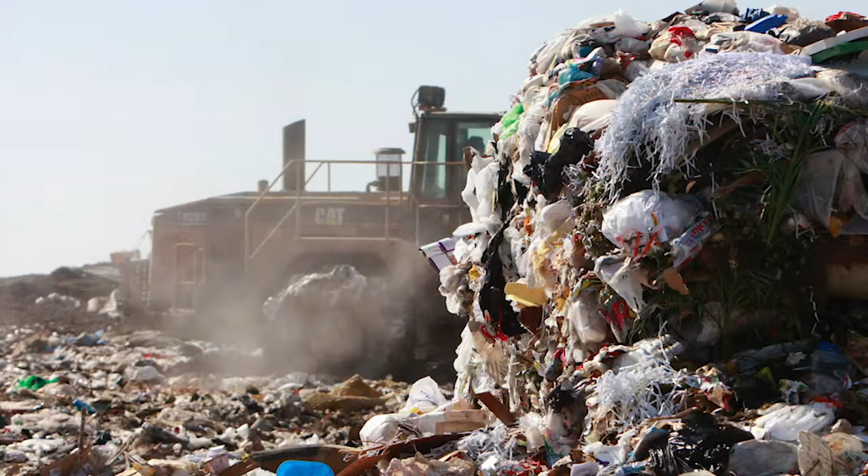Every year, approximately 2 billion metric tons of solid municipal waste are produced worldwide. The World Bank projects that by the year 2050, this figure will have increased by 70%. Finding sustainable solutions to society's waste problem is now a high priority in the public conscience.

For the 2020 Solar Decathlon Design Competition, we are excited to work with a client that is setting the gold standard for contemporary waste management in our home state of Virginia. The Prince William County Landfill, officially designated as an exemplary environmental enterprise, is pushing the bounds of recycling technology, landfill gas harvesting, cogeneration, and much more. Now, the county desires a new building for their administrative staff that doubles as a nexus for STEM education and community engagement. This is where we, Team Compositive, propose the Eco Park Learning Center.

But first, a bit about us. Our team name Compositive is a composite of words sharing the same prefix, such as comfort, community, and complexity. The prefix com means together, and the word positive expresses our optimistic attitude that we bring to the design challenges. Compositive means that we are with positivity.

Our Compositive team is a diverse group of students with majors ranging from architecture and building construction to macromolecular science and civil engineering. We have 7 graduate students and 21 undergraduate students working in collaboration to enrich the knowledge of every member on the team. We divided our team into 5 sub-teams, focusing on the topics of architecture, landscape architecture, marketing, engineering, and real estate, where sub-team leaders coordinated the work efforts conducted by each individual sub-team leader.

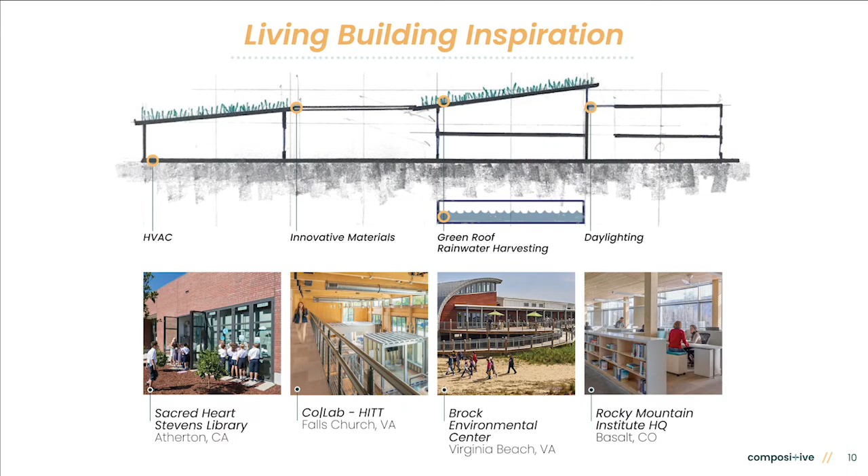We employed a cyclical design process for developing this project. Each new design proposal was informed by engineering analyses and budgeting breakdowns. Iterating through this cycle allowed us to produce effective innovations, pushing the envelope of construction practice while ensuring financial feasibility.

Our design for the Eco Park Learning Center was guided by 4 overarching design goals. First, an emphasis on conservation by activating existing ecology using reclaimed materials and utilizing iTree tools to identify the best trees to preserve. Second, a focus on community engagement by accommodating local school groups and universities, hosting community events, and providing park-like amenities.

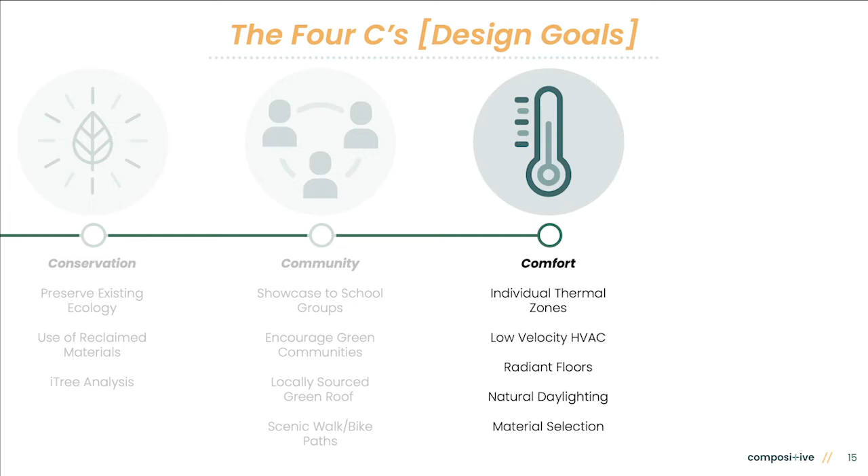Third, a commitment to occupant comfort by planning for individual thermal zones, low-velocity HVAC systems, and biophilic lighting and material selection. And finally, the integration of cost awareness by including concepts of intelligent constructability, finding financially attainable solutions, and maintaining low operational costs.

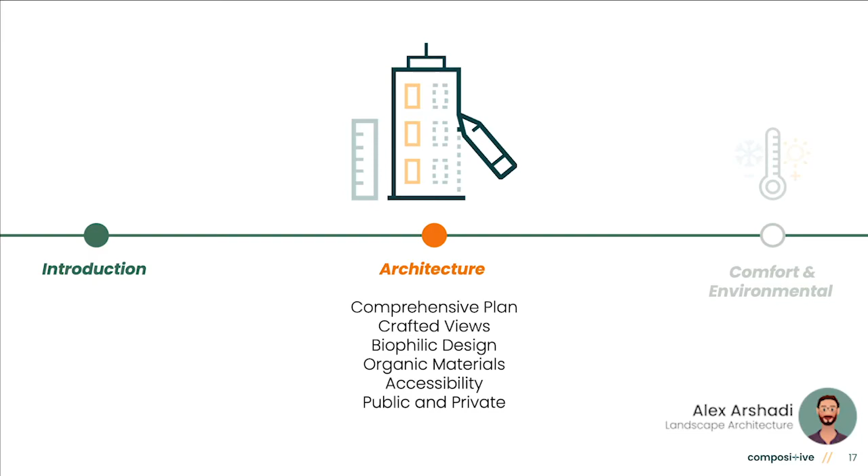Architectural design is where the play of form and function come together. We strove to build the narrative of EcoPark into every piece of the composition. To begin, the boundaries of our building lot do not mark the physical extent of our design vision. We believe in fitting architecture to place.

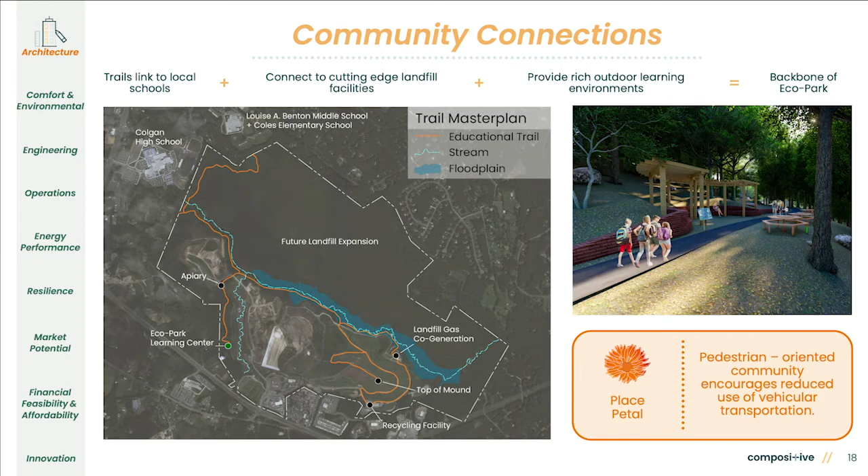To this end, we have provided our client with a vision that links the Learning Center to 3 public schools through educational trails. These features fold into the place petal of the Living Building Challenge by contributing to a more pedestrian-oriented community.

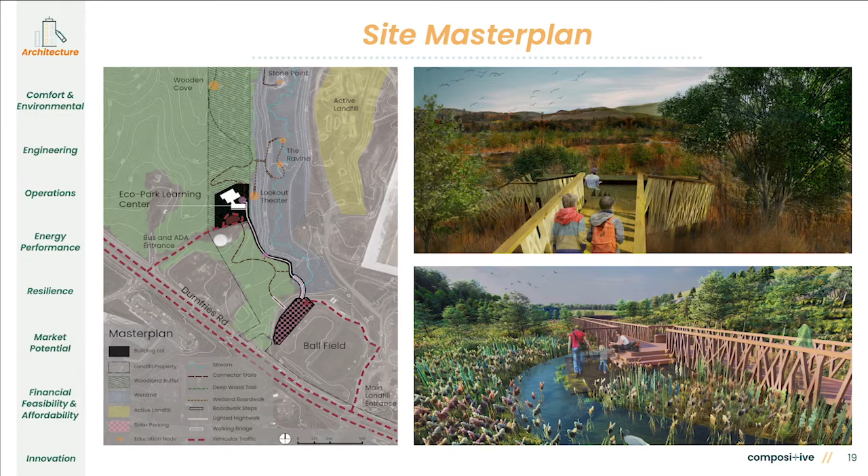A constructed wetland borders our building to the east, which is explored with a boardwalk and educational engagement stations. More trails link to innovative landfill facilities and native woodlands. The EcoPark Learning Center is nestled into a forested area, perched on a hill on the western edge of the landfill property. The building form is conceived to merge the architecture with the landscape and create a strong visual relationship with the landfill.

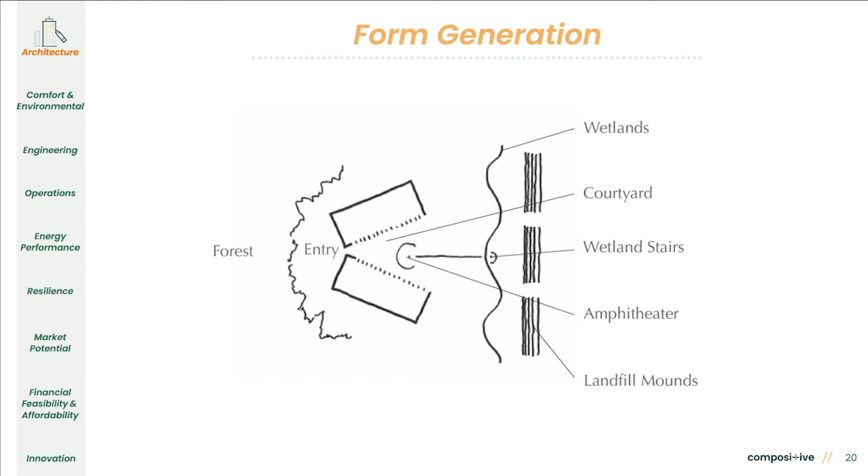The view of the landfill will change as the mound grows over time, offering a strong point of reflection for residents of the building.

Visitors who arrive at the EcoPark Learning Center are initially greeted by a building that isn't there. On approach, a large grassy hill is revealed to be a green roof, and visitors spill into the welcome plaza, where a river of recycled glass leads to the front entrance.

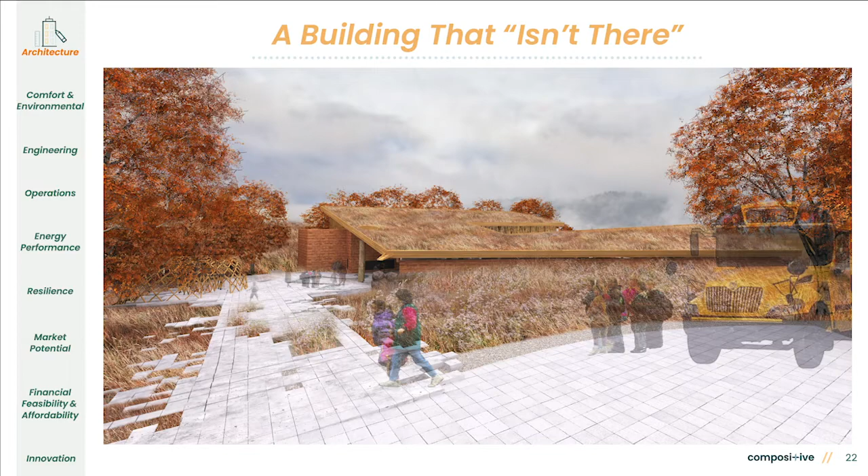Passing through the lobby reveals a central courtyard, framed by the building's wings. The architecture flares open toward the continually morphing view of the landscape, which will change over the next decade from a theatrical industrial landscape to pastoral grassy hills.

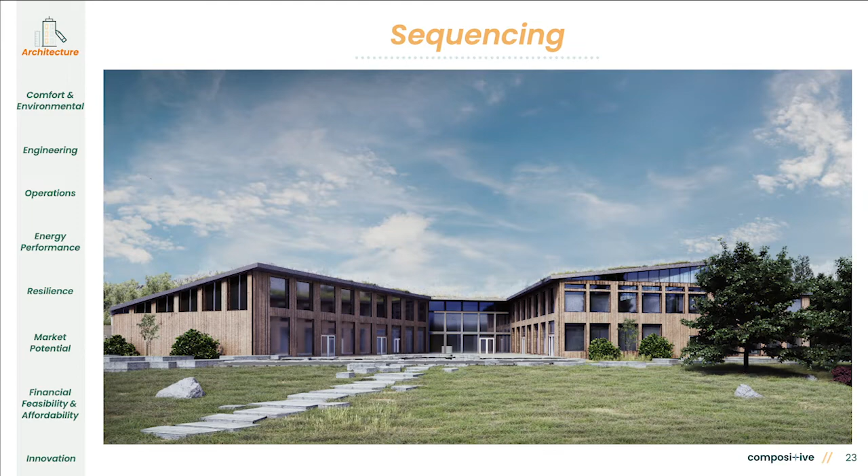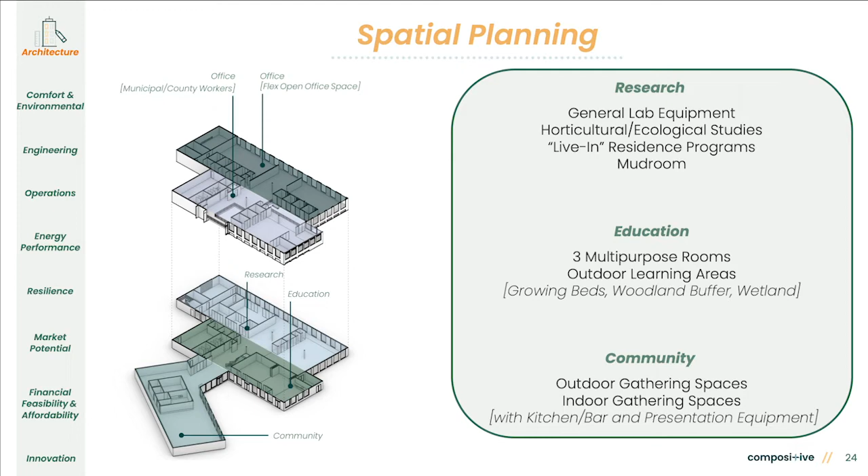Creative space planning allows for community, academic, and office spaces to coexist. Accessible community spaces in the southern wing can accommodate gatherings and conferences. Research lab space on the first floor allows the Learning Center to expand its reach with live-in residence programs with state universities. Educational space takes the form of multi-purpose classrooms on the first floor, tailored to STEM education.

Finally, office space is located partially on the first floor and covers the entire second floor. Separate areas for closed office space are allocated for municipal staff, and rentable open office space is available for tenants. Rentable offices are further divided between the first and second floors to mitigate issues pertaining to noise and privacy. Office amenities include kitchenettes, break areas, conference rooms, breakout rooms, and a lactation room.

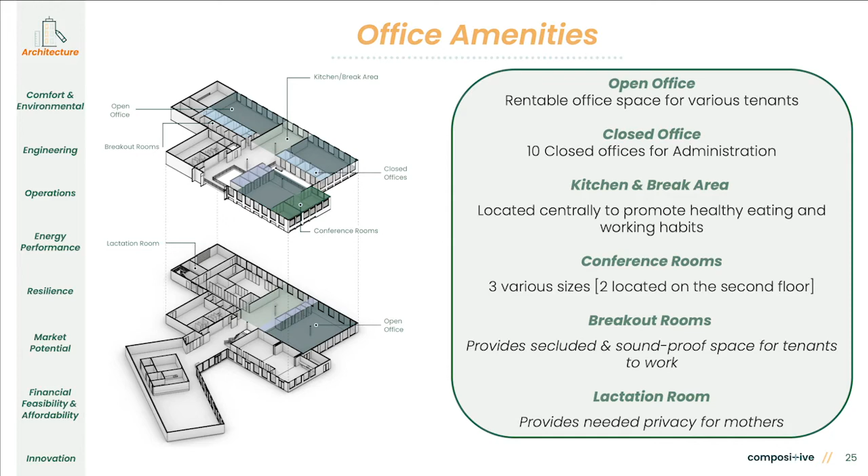Comfort and environmental quality is a priority for the Learning Center's occupants. Inspired by biophilic design principles, we take advantage of natural daylight patterns to provide an optimal interior environment. Daylight factors, including time of day, glare, heat gain, and visibility, were modeled for the design of 2 distinct types of spaces, task-oriented and non-task-oriented.

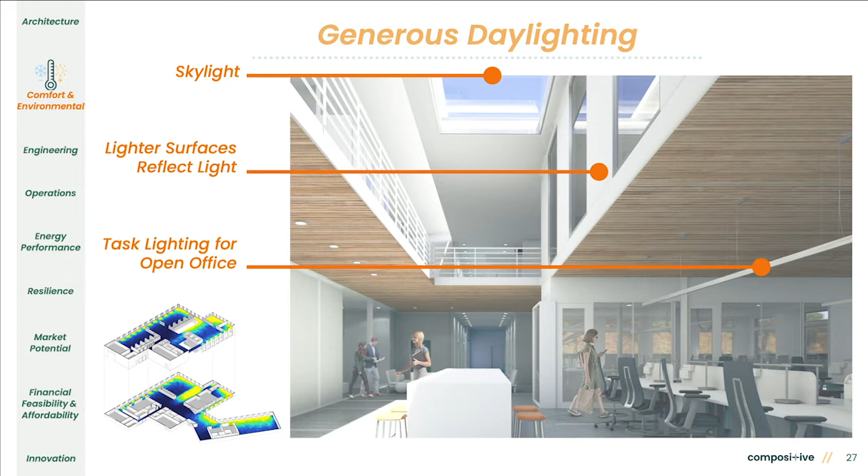Within task-oriented spaces, an open floor plan combined with natural daylight strategies facilitates an improved daylight factor. This increases environmental quality and reduces the need for artificial lighting. Where supplemental lighting fixtures are necessary, efficient LEDs are installed with motion sensor systems to reduce wasted energy.

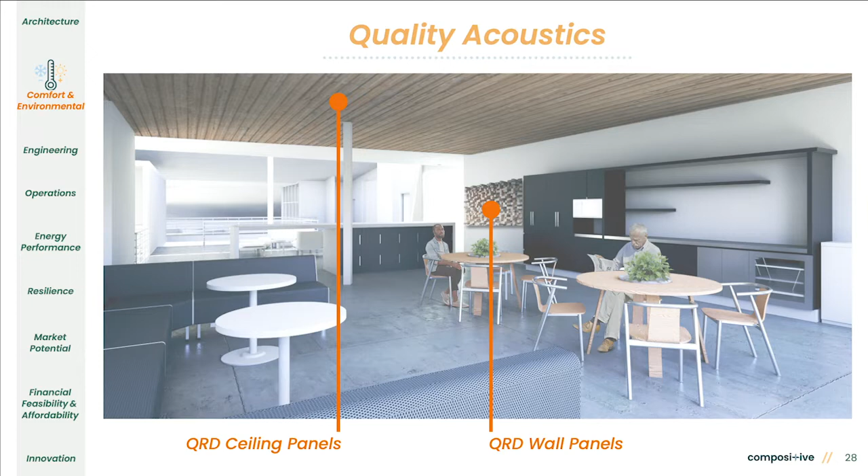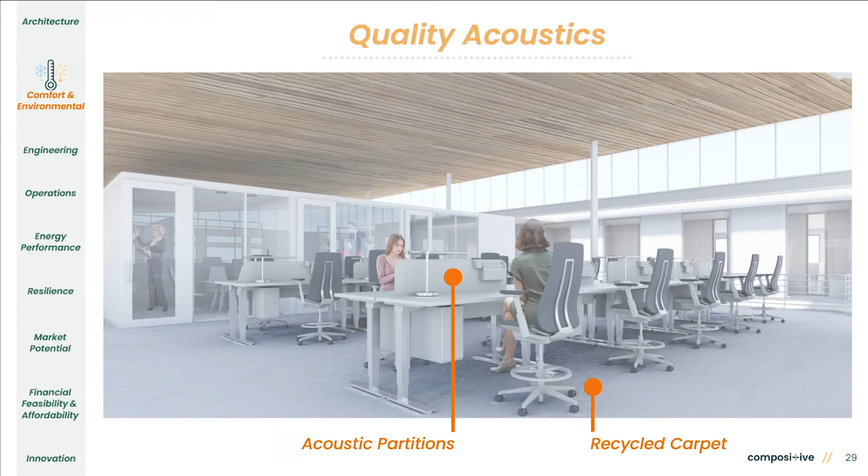Acoustic quality is achieved with 3 design strategies. First, quadratic residue diffusers in the form of ceiling and wall panels diffuse ambient sounds and absorb acoustic reverberations. Second, acoustic partitions between working spaces in the open office will ensure a comfortable environment for phone calls and conversations, while our recycled carpet acts as a natural acoustic absorber to ambient noise.

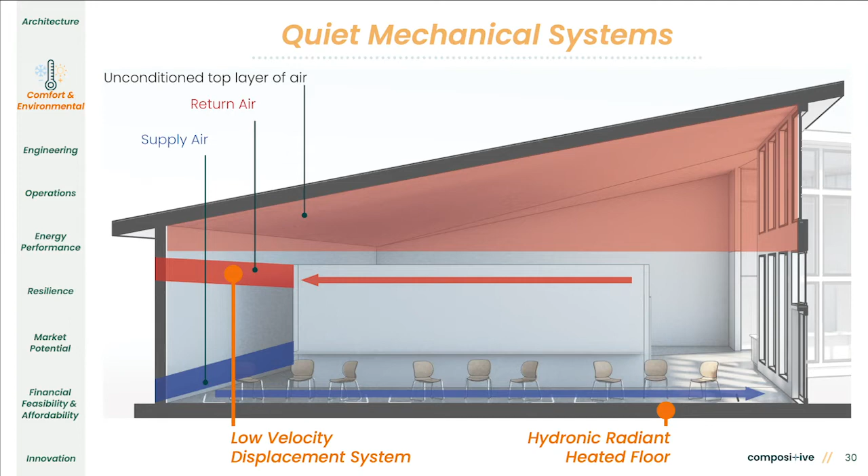And third, the mechanical systems in the south wing operate virtually silent by incorporating a low-velocity displacement ventilation system and a hydronic radiant heated floor.

Our engineering systems are designed to achieve ambitious sustainability goals. The enclosure system of the EcoPark Learning Center includes a green roof, structural CLT, and stabilized earth block veneer.

The first component, the green roof, provides thermal mass that collects heat throughout the day and regulates roof temperature to reduce energy loss. Below the green roof are additional layers, such as an R40 XPS insulation, that reduces heat loss through the roof.

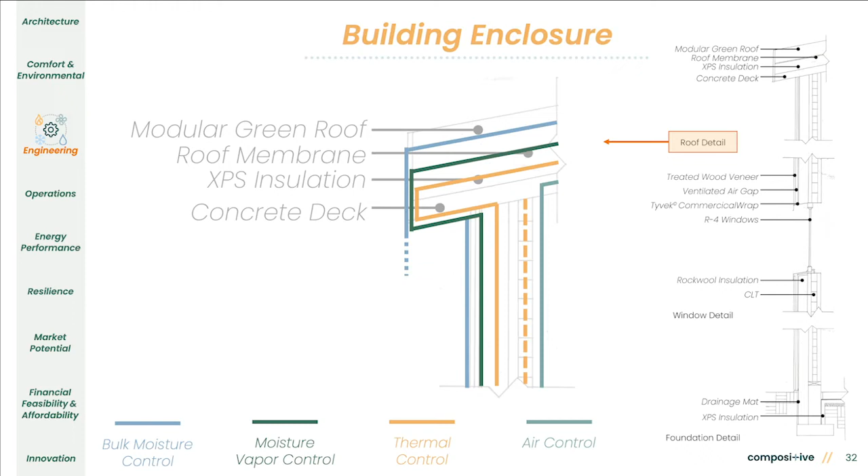The second component, the CLT wall system, adds thermal mass to the vertical enclosure and allows for continuous insulation. Using R33 rock wool in the wall supports our pursuit of a low embodied energy building while maintaining strong thermal insulation. We studied the embodied energy of the enclosure materials and ultimately selected stabilized earth blocks as an architectural veneer because it possesses nearly a third of the embodied energy of standard brick veneer.

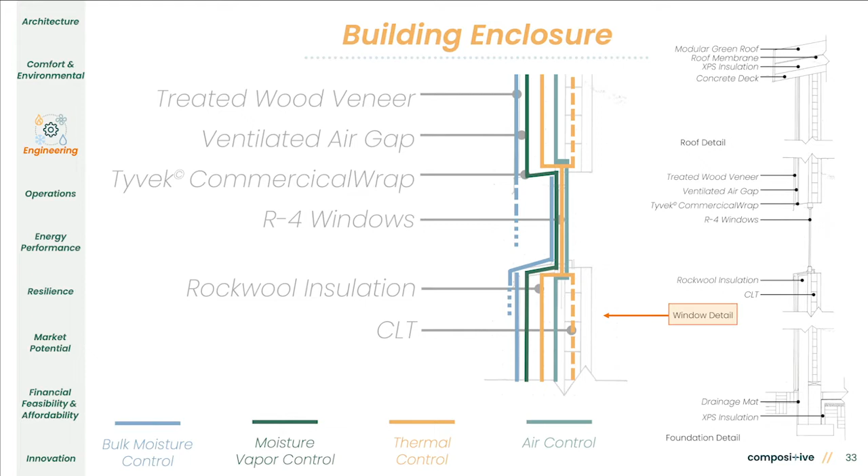Our mechanical systems use 3 major components that provide excellent control of the interior environment. In the south wing's assembly room, a hydronic radiant heating loop warms the space through the floor, reducing acoustic interference during events.

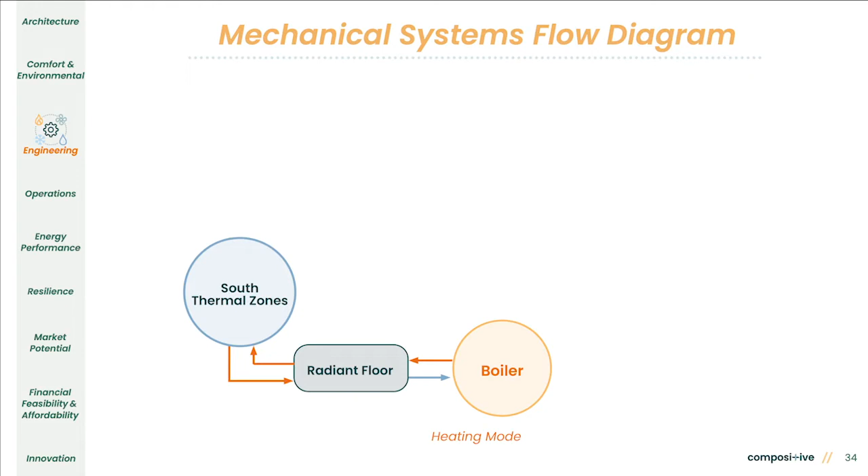For cooling, a displacement ventilation system with an integrated economizer can utilize either outside or return air to condition the space, depending on outdoor conditions. The displacement ventilation air handler also utilizes a heat recovery process between exhaust and fresh air intake ducts, reducing energy demand for ventilation in the south wing.

In the north wing, where offices are located, a 4-pipe hydronic FCU system provides every occupant with flexibility to adjust their local climate. Occupants can modify each of 17 thermal zones designated within the building from their thermostat. Ventilation for these zones is provided through a dedicated outdoor air system with an integrated energy recovery wheel.

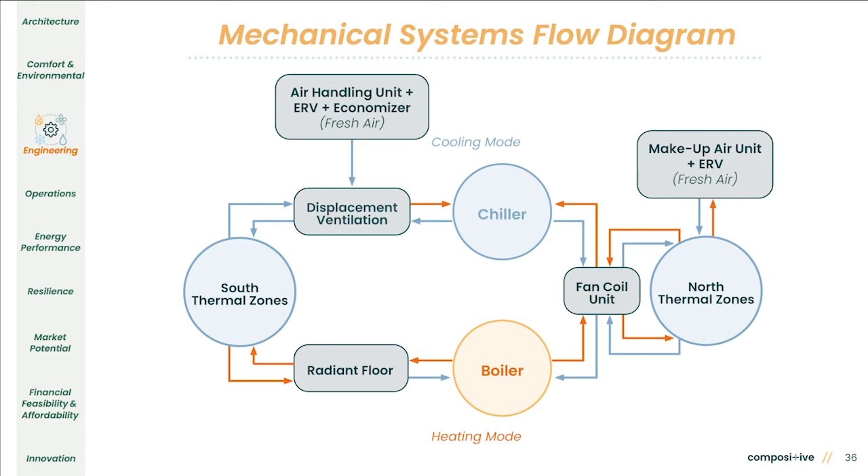Water independence is an important pursuit of the EcoPark Learning Center, which is completely supplied by a rainwater collection and purification system by RainFlo. The Learning Center requires 50,000 gallons less water than a typical office building of the same size, made possible with a composting toilet system.

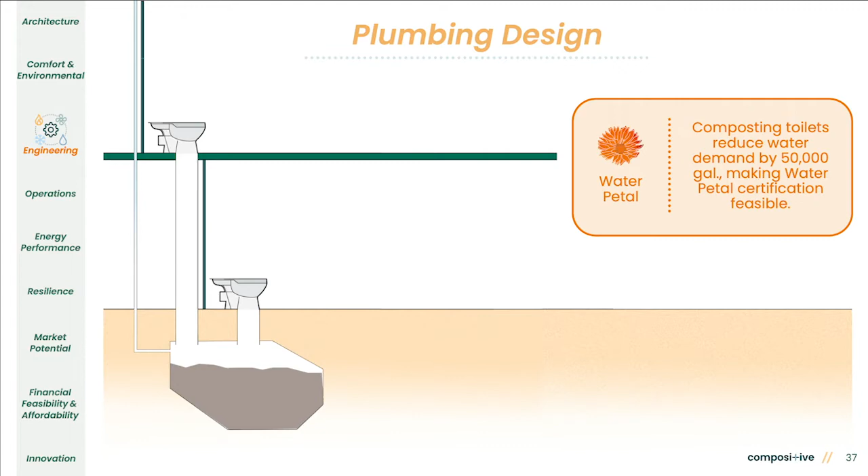To ensure easy maintenance to vertical chases, we have centralized and stacked plumbing fixtures and mechanical spaces. All horizontal runs are exposed overhead to allow for simple maintenance and easy reconfiguration.

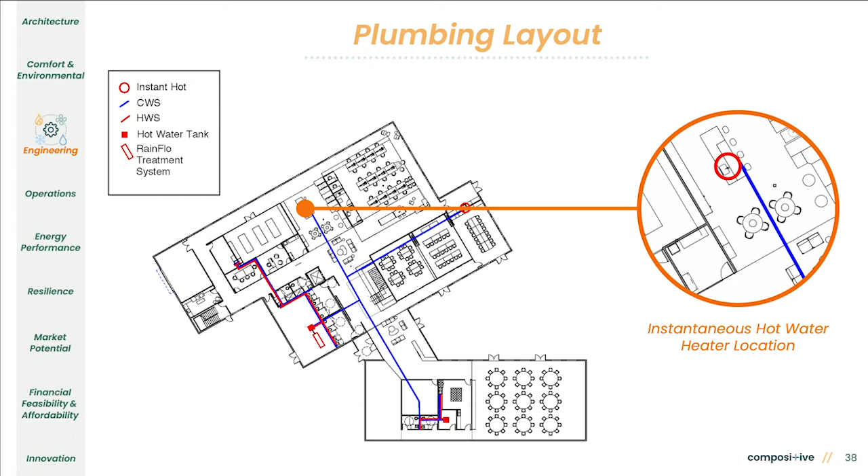To increase energy efficiency in the potable supply system, instantaneous hot water heaters are installed on 3 sinks, which heat supply water right at the source, allowing us to reduce long hot water supply runs.

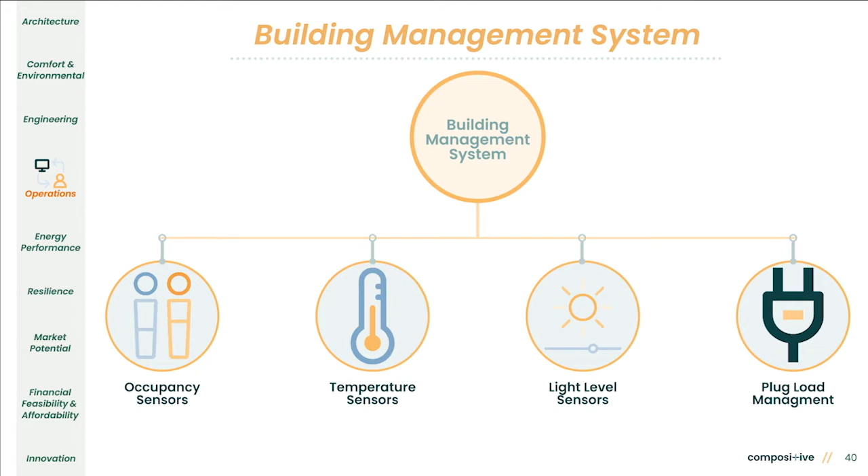We have ensured that the building operations are smart, efficient, and responsive. The Eco Park Learning Center's building management system is designed to balance comfort and efficiency. Sensors for occupancy status, temperature, and light levels allow the HVAC system, electrical system, and artificial lights to direct resources where they're needed. With watt stoppers, we can save over 10% of annual energy through the management of dormant plug loads and lights.

One of our missions at the Learning Center is to demonstrate the building's sustainable technologies to visitors. We introduce an interactive smart wall to display current energy production and energy use around the building. Data tracking and live updates allow users to compare daily, weekly, monthly, and annual energy data to any time period in the building's lifespan.

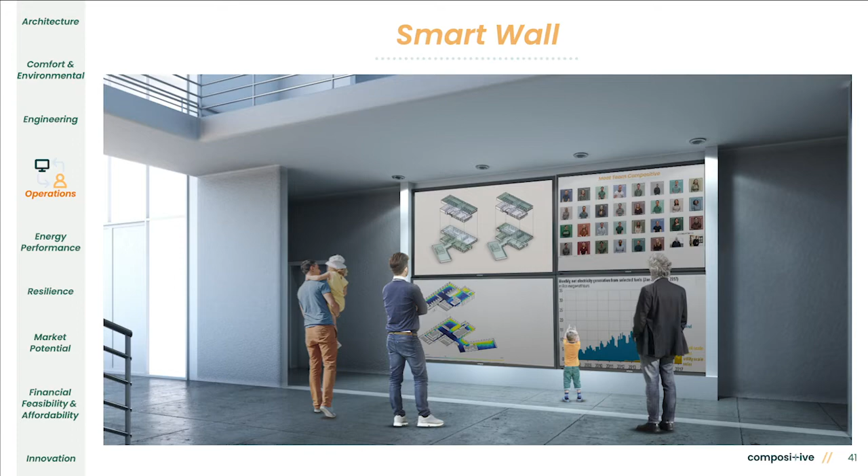We achieve excellent energy performance with the integration of both active and passive systems. One of our design solutions involves retrofitting an existing parking lot with an overhead structure with a customized 110 kilowatt PV array. As a side benefit, this system reduces secondary CO2 emissions by cooling the temperature of parked cars under the structure.

For this application, we chose SunPower's Maxeon Gen 5 commercial solar panels. In addition to leading the industry in power density, their panels feature a durable design that reduces potential damage. This is especially important in our location at a landfill where dust and debris can be picked up by winds.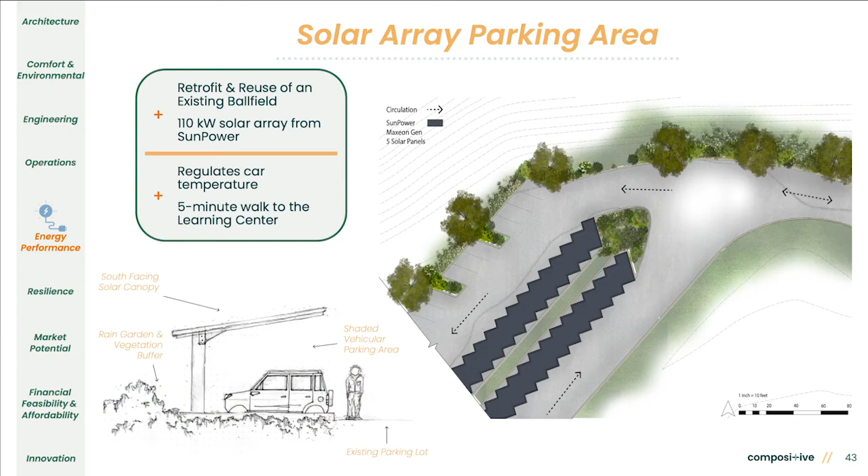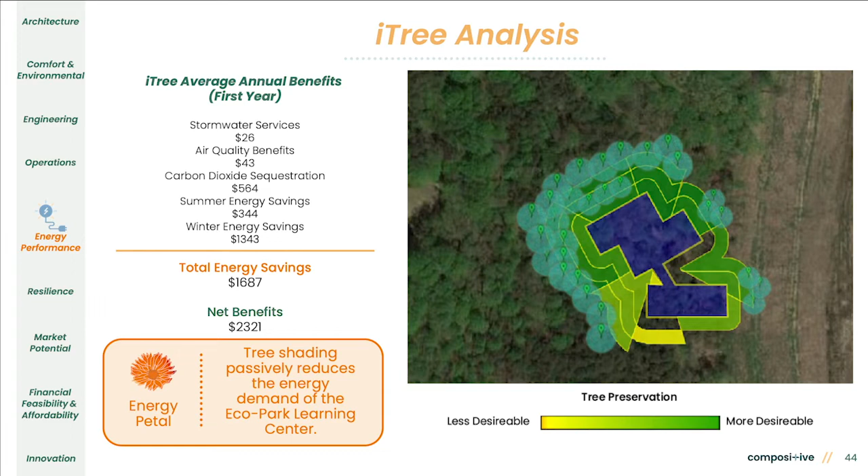Our building's efficiency goals are partially met with passive strategies that capitalize on the wooded location of the site. We quantified these benefits with an online modeling software from the USDA called iTree Design. iTree helped us to determine which trees are most important to preserve during construction. Our optimized tree placement model predicts total energy savings of more than 7,000 kilowatt hours, reducing utility costs by around $1,700 annually.

Our energy model was developed with OpenStudio. The first iteration of our model, which consisted of 10 thermal zones with ideal air loads, was based on 2009 ASHRAE standard construction sets. This resulted in a source EUI of 92.5 kilobtu per square foot. This first iteration represented our baseline reference model.

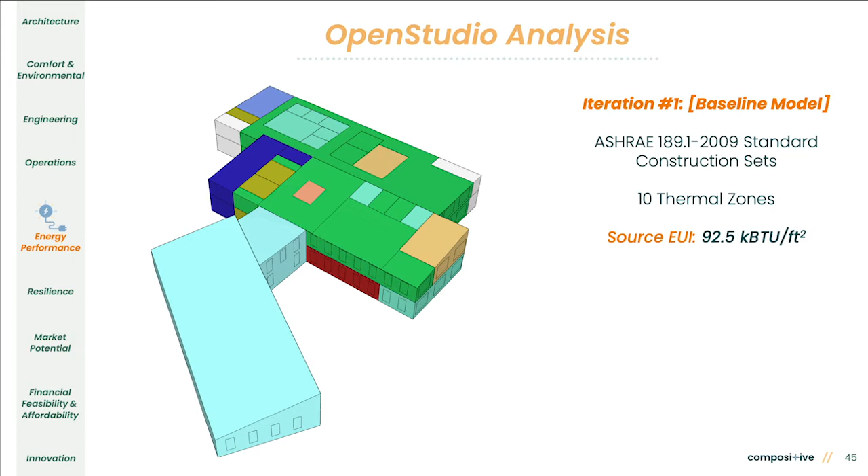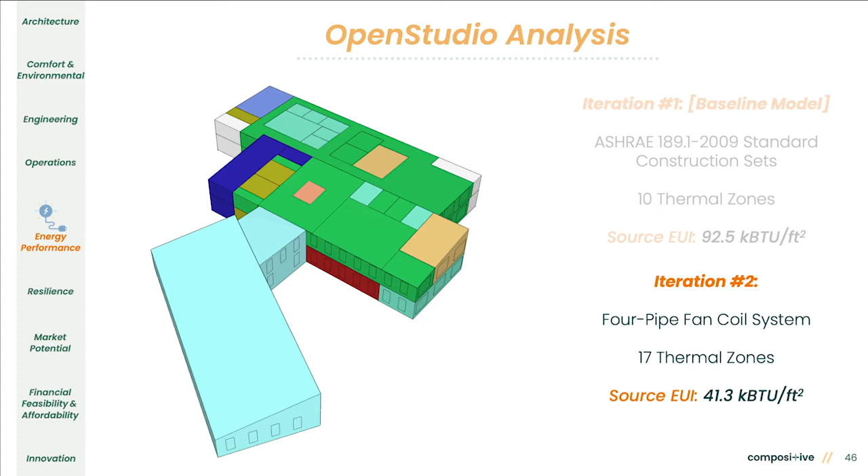The second iteration applied an efficient 4-pipe fan coil unit system to our model, which consisted of 17 different thermal zones. Net zero energy design loads and profiles and schedules were applied to this model, which resulted in a source EUI of 41.3 kilobtu per square foot.

Our third and final iteration improved the enclosure system with an R33 wall and R40 roof, as well as an R10 slab. This reduced our site energy demand by 18.8% and brought our source EUI to 39.5 kilobtu per square foot.

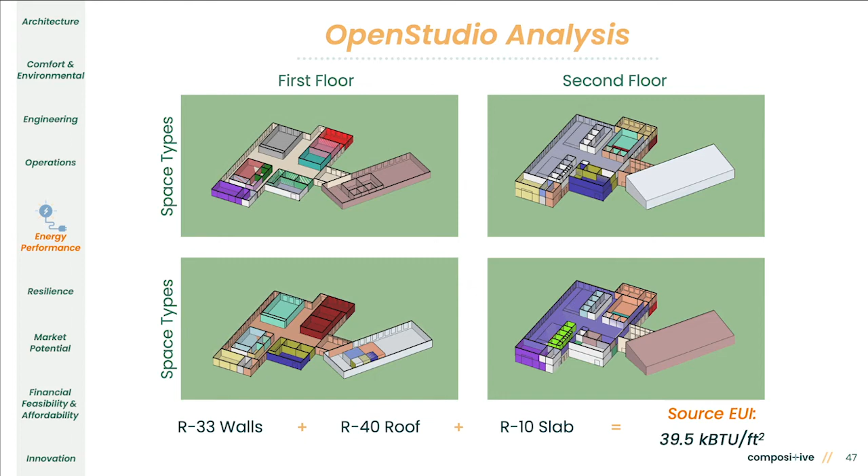Our resiliency strategy hinges on 4 critical measures of protection: the building envelope, site resiliency, food production, and rainwater harvesting.

The building envelope's continuous thermal and vapor layers ensure that moisture is effectively managed to promote longevity. A German code compliance tool called Ubakus allowed us to compare initial construction options and identify possible issues with interstitial condensation. We then evaluated our final design with a WUFI analysis, which showed some increase of moisture in the winter months, but balanced out with sufficient drying potential in the summer months.

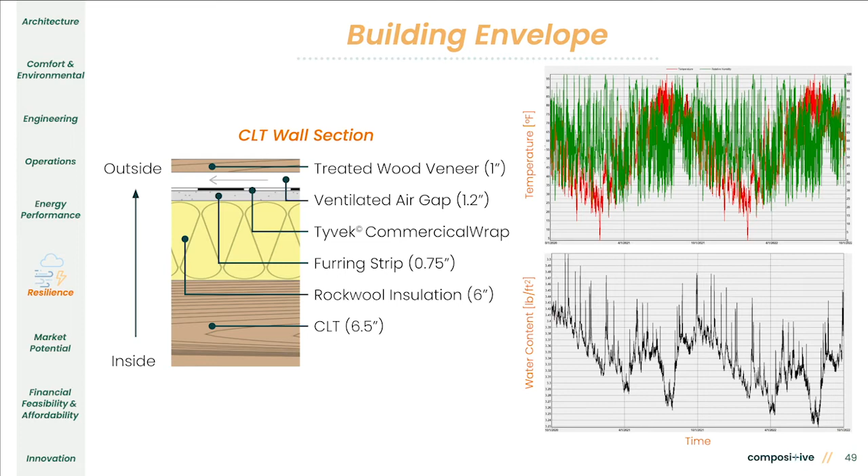Building placement was carefully considered to minimize potential flooding hazards. This is especially important in light of worsening hurricanes due to climate change and our location near the Potomac River. We sited the building in FEMA Flood Zone X, the lowest risk zone, on top of a hill and near a wetland. The hydrologic functions of the wetland lower the flooding risk even further.

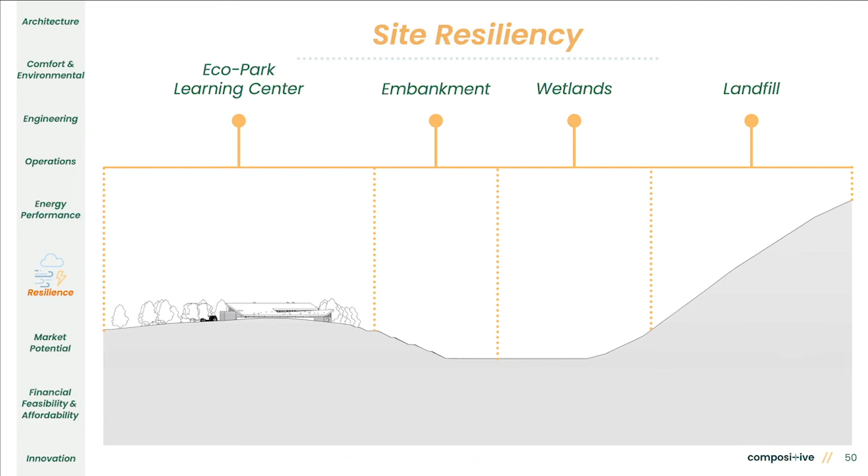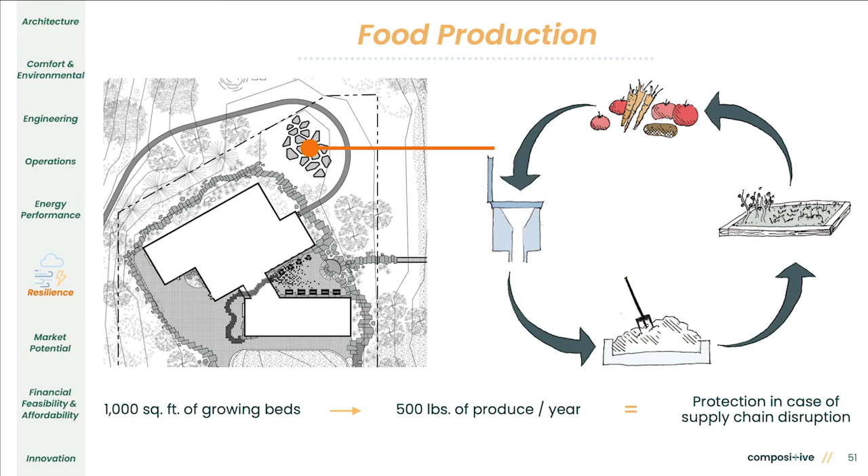Local food production is important in the event of a supply chain disruption, which is why urban agriculture is required for the place petal of the Living Building Challenge. At the Eco Park Learning Center, there are 1,000 square feet of growing beds producing 500 pounds of produce per year. These growing beds are fertilized with compost harvested from the building's composting toilets, tying into the narrative of responsible waste management.

Finally, rainwater harvesting contributes to self-sufficiency and is necessary to achieve the water petal of the Living Building Challenge. Each year, we are able to capture over 316,000 gallons of rainwater. One cistern stores water for green roof irrigation, and another smaller cistern stores water that is fed through our rainflow purification system and directed to potable use. Annually, about 125,000 gallons of water will be available for domestic potable uses.

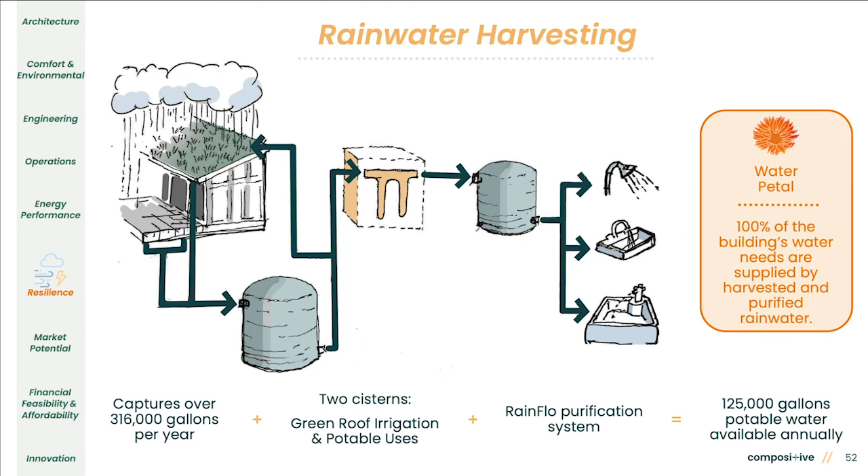We believe that the Eco Park Learning Center has excellent market potential. The building was designed to meet an express need by Prince William County. While fulfilling the municipality's needs, we provided rentable co-working space, something that is currently lacking in the region. This state-of-the-art building, associated with an extraordinary environmental enterprise, is fit to attract other municipalities, sustainable tech startups, and waste management companies.

There are also opportunities for various universities and research groups to secure residency in the space to operate the labs. Office space is available by the desk, and tenants will have access to amenities provided by the building as well as the park-like surroundings.

Financial feasibility is important to provide Prince William County with a realistic vision. We performed multiple cost-benefit analyses to inform the Learning Center's design. Ultimately, our construction budget ended up at just over $10.5 million, which comes to roughly $330 per square foot.

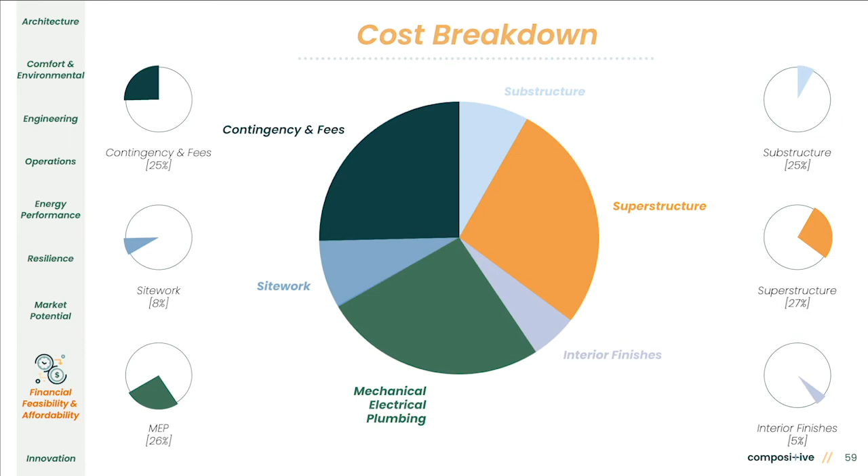Our HVAC and glazing system have a higher installation cost than standard elements, but drastically reduce the overall operation and maintenance cost. Additionally, our building position and roof overhang helps manage our solar gains.

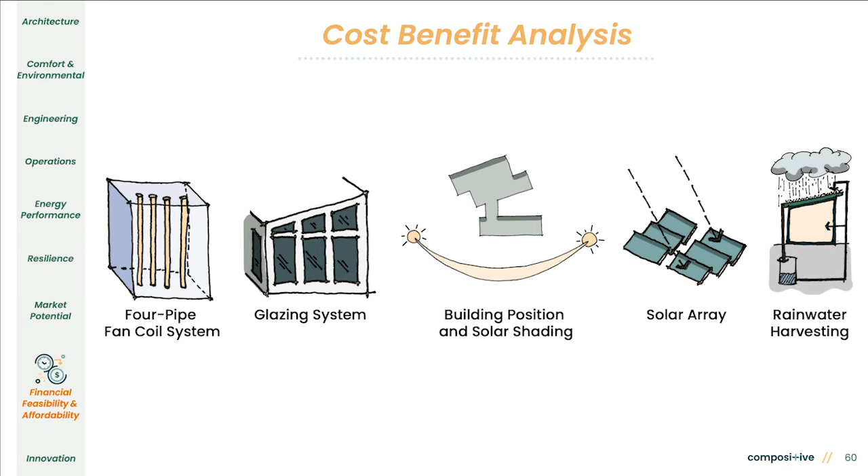The implementation of a solar array and rainwater harvesting system allows us to reduce our annual energy and water costs down to zero. Once we calculated our final construction cost and compared it to traditional methods, we concluded that the cost premium is justifiable due to the long-term energy and water savings.

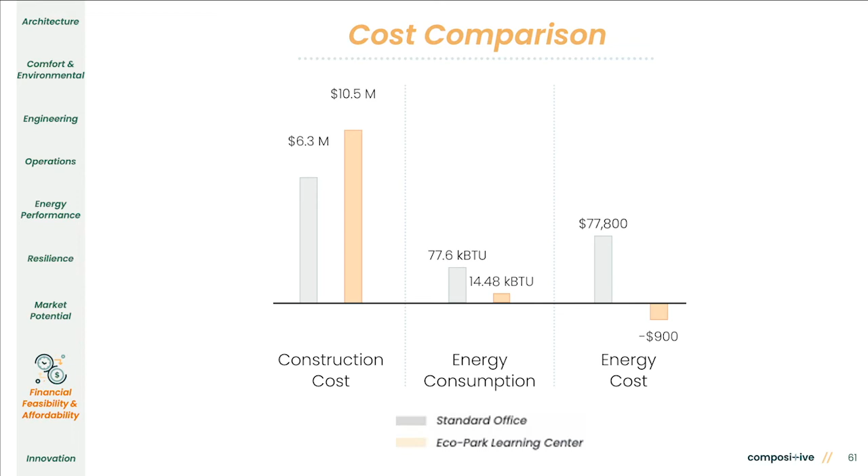Our energy consumption is 1/5 of a typically built office building. Our solar array allows us to cover all of our energy demand and generate a surplus of energy, giving us the potential to earn over $900 annually on our excess production.

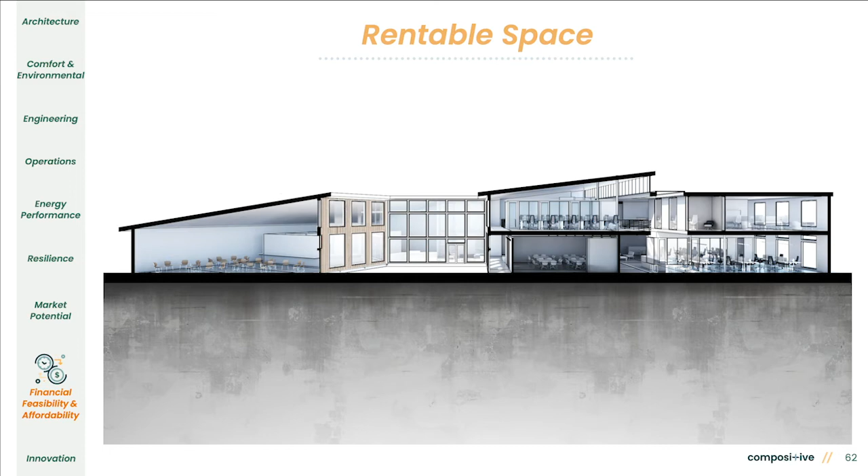With the additional rentable workspace at the Learning Center, we can generate income to help offset the costs needed to finance the building. We performed the pro forma analysis and determined that maintaining 80% occupancy of the rentable space can cover 45% of our operational and maintenance costs.

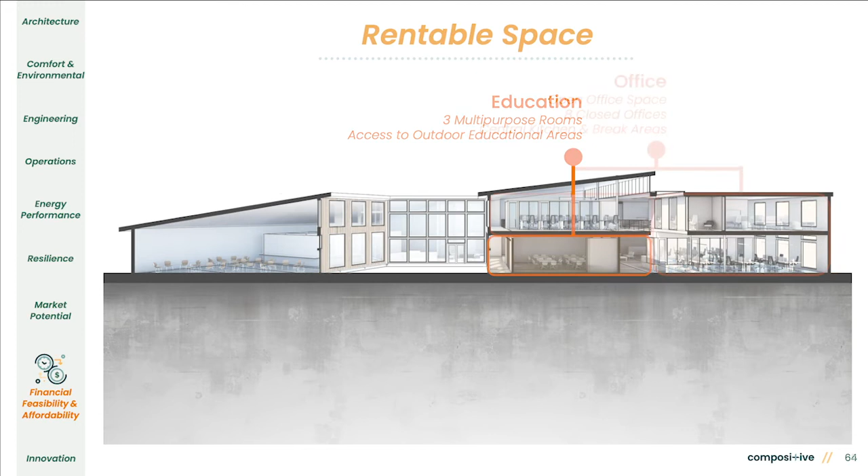Rentable space includes the large gathering area, which is equipped with a catering kitchen, 3 multipurpose rooms that are set up to engage students in STEM programs and help facilitate indoor-outdoor education. Additionally, there are various open and closed office spaces that provide access to a variety of office amenities.

Our innovations are generated from a pool of diverse knowledge brought by our interdisciplinary team. Responsible materials form an important piece of our building's didactic value and true environmental sustainability.

Biophilic materials are a very important pursuit for us, enhancing the building occupants' experience in the space. These materials are locally sourced, recycled, and reclaimed whenever possible.

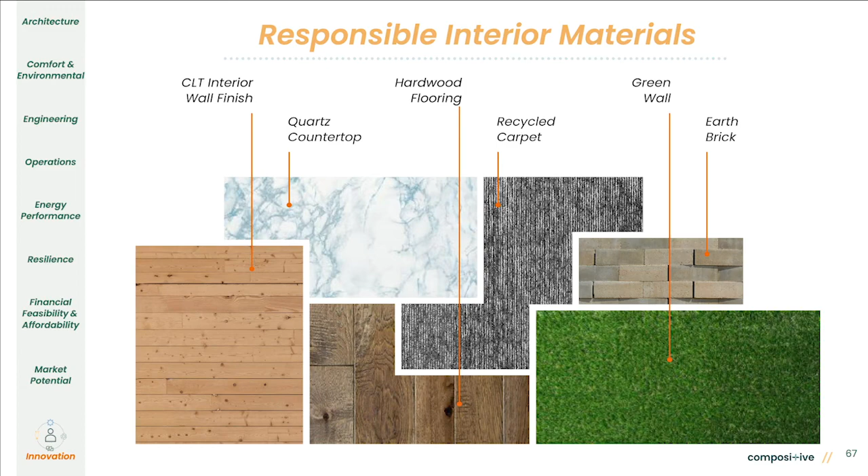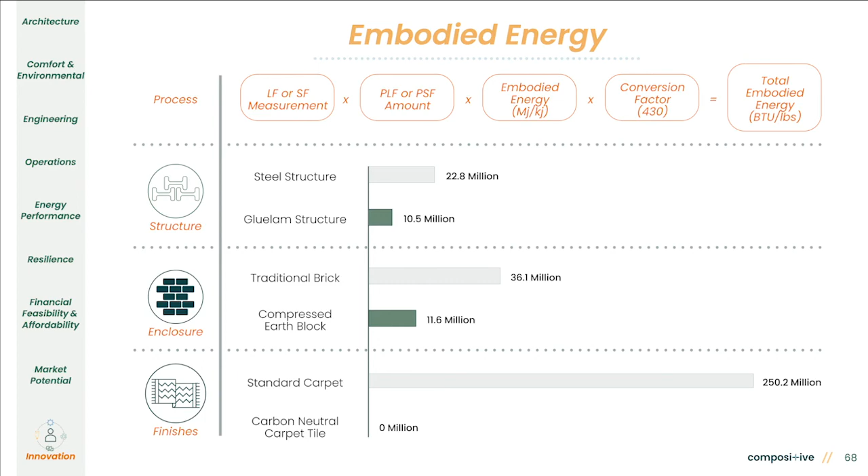Our material selection was heavily influenced by their respective embodied energy. Many of these materials are equatable in durability and strength, excluding cost. While these materials may cost more, the reduction on environmental impact is imperative to our design.

Material choice also expresses itself in the landscape design, such as recycled concrete chunks and recycled glass pavers. Excavated soil from construction will be stored on site to engage school children in the simple production of compressed earth blocks. These blocks can be engraved with student names and built into seating spaces along the woodland trails.

These materials will serve as talking points on tours and build the narrative of sustainable waste management into the Learning Center's physical body.

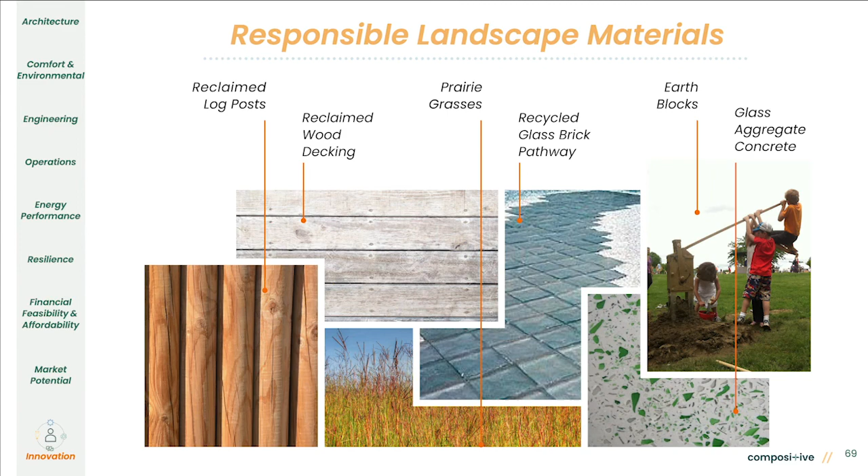Another one of our innovations uses strategic site planning to preserve a tributary of Powell's Creek. This stream, which runs through the middle of the landfill property, is currently considered for piping by Prince William County in order to eliminate the floodplain and provide more space for landfilling.

We are aware that floodplain soils hold large amounts of carbon, so we aligned one of our bike trails along the stream to provide an incentive to preserve it.

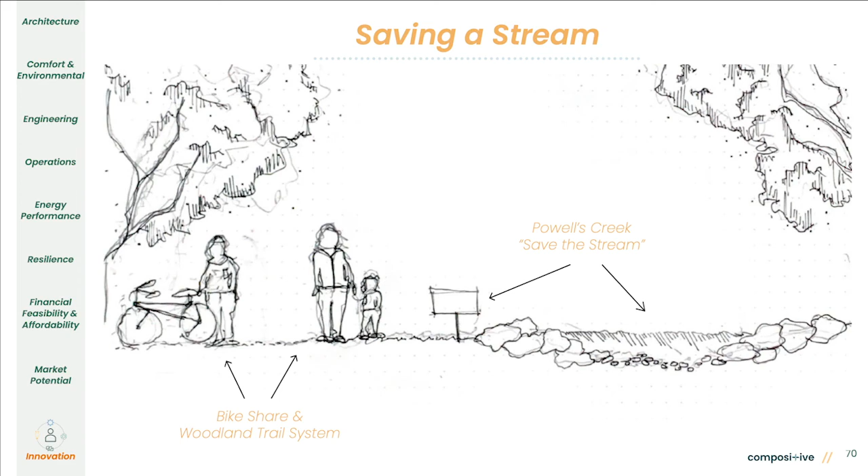To conclude this presentation, we want to cycle back to our design goals. The 4 C's of conservation, community, comfort, and cost awareness are chosen to respond to the needs of every stakeholder in this project. These include the local ecology, the people of Prince William County, the occupants of the Learning Center, and the municipality. It is important to us that all living systems are winners in this process.

This ambitious design philosophy led us to push for Living Building Challenge PETAL certifications. We went above and beyond the client's expectations and designed outside the bounds, bringing the mission of the Eco Park into the entire landfill master plan.

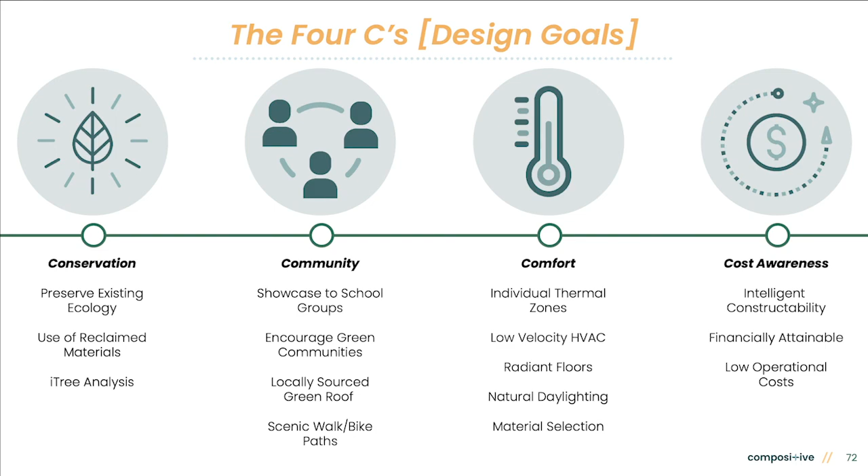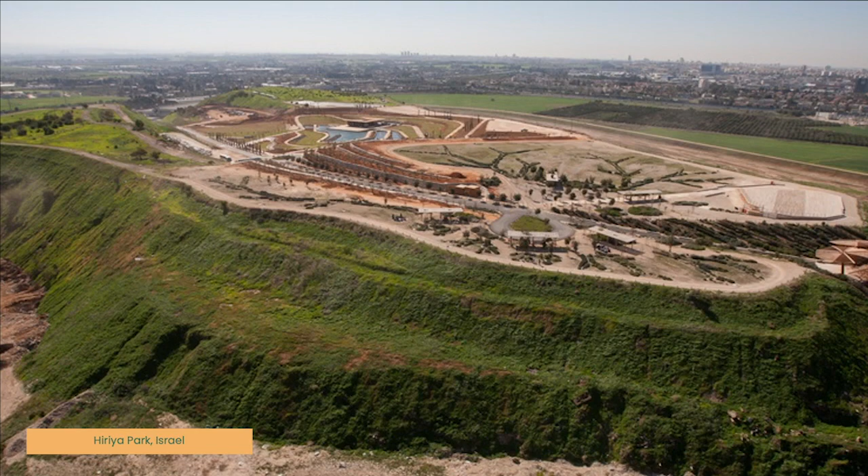And this brings us to our ultimate vision. Across the globe, we have seen in recent decades the transformation of decommissioned landfills into valuable public land. Examples such as Mount Trashmore in Virginia Beach, Hiriya Park in Israel, Fresh Kills Park on Staten Island, and many, many more serve as inspiration for what these industrial sites can become after their operational life.

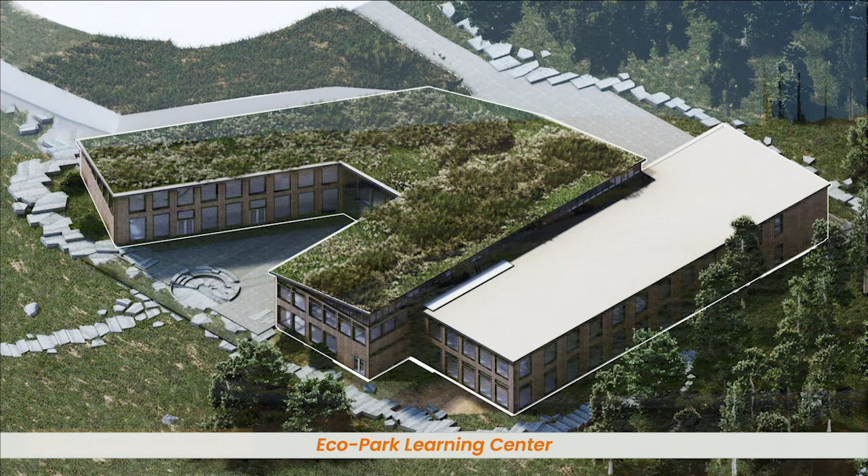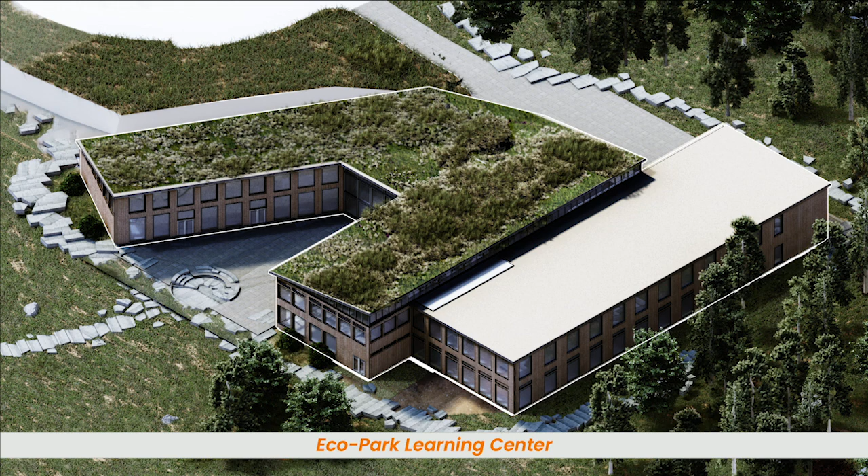Prince William County landfill is estimated to have all of its mounds filled and capped by 2060, but the Eco Park Learning Center is built to last far beyond this date. We hope that the groundwork laid by our Eco Park Master Plan will activate a repurposing effort for the Learning Center, so that it may become the cornerstone of this region's most spectacular public park.

This final act of recycling will complete the narrative. We are Team Compositive, and we thank you for listening.